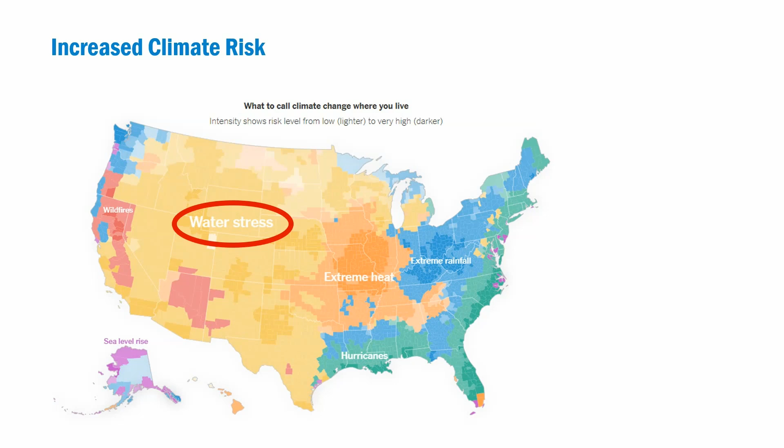Changes in our climate and trends in different precipitation patterns and changing hydrology have widespread impacts. Also issues like wildfires and the effects that it can have on our watersheds and water quality can really have large spread impacts and can have a lot of costs associated with solving these kinds of problems.

So changing precipitation patterns, drought, more intense heat at different parts of the year, it's kind of different themes that people have been talking about today. And then, of course, increased costs.

All right, so before we get into some of these adaptation plans and planning efforts, I wanted to define a few things. So when we're talking about vulnerability, you can think about it like a sensitivity analysis regarding certain populations in the community or a state or maybe even a county. So talking about your populations and how vulnerable they are to different hazards and how sensitive they are.

So a good metaphor for that might be if you're going into a blizzard wearing like a windbreaker versus if you go in wearing like a parka, like a winter parka. You're going to be more or less vulnerable to these kinds of hazards.

And then the hazards themselves, the main thing to mention is they're either human-induced or natural. And then another big part about that is the trend. So it might not just be a singular event like a blizzard or a tsunami or any of these other climate-induced effects. It could be a trend, like I mentioned earlier, with precipitation trends changing in the state of Utah and the Intermountain West.

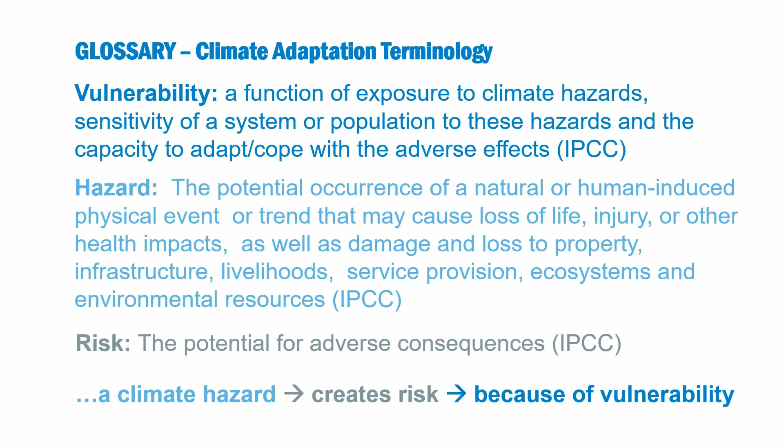So, of course, this is another busy graph. So if you want to take a picture of it, great. Otherwise, starting from the beginning, we need to identify those hazards. So I pointed some out earlier with the drought, different aspects of drought and changing precipitation, all these different risks and extreme events that are having different impacts on our communities and vulnerable populations.

And then we kind of want to move into the second phase. So we're identifying features at risk. So these are different assets in the community that might be more or less vulnerable to certain impacts. So these could be...

Infrastructure. So that could be your water supply infrastructure, your stormwater infrastructure. You could also be looking at your assets considering society and people, your communities, your different populations that enhance communities or strengthen different parts of that. And then obviously natural resources.

So locally, the Great Salt Lake, that's a very strong resource that we want to protect, and looking at ways—there's a lot of planning efforts going on right now to mitigate some of those risks associated with these assets. So moving along, we need to associate how these hazards affect these assets, and kind of link them together.

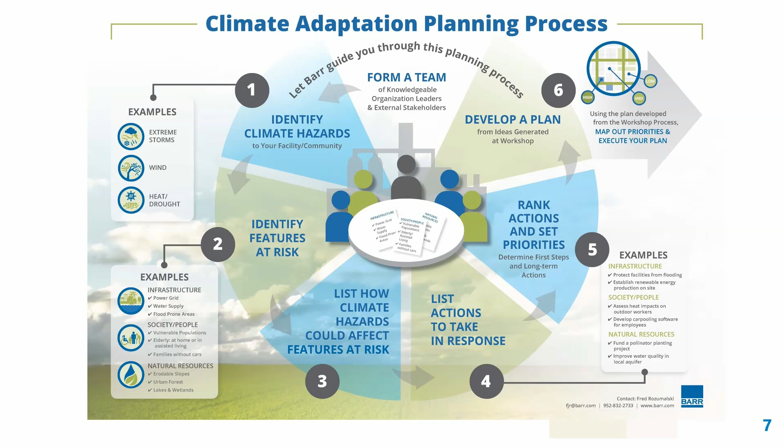And then you're setting your priorities as the next step. So even if we have a list of all these things, what are we going to start funding first? What if we have federal funding or state funding, what can we start to allocate funds for now, working towards creating or completing this plan that we've built. So that's moving on to the last phase, developing this plan and actually executing it. That's what we're going to get into next, talking about some real-life planning examples.

I'm not going to spend too much time here, but I wanted to make a point, going back to identifying your assets. A lot of assets in a community, or whatever domain you're setting for your study, can actually also be vulnerabilities too, so it's good to take that into account. A hospital can be a really powerful asset to a community where people can go if they have medical needs, but it can also be a vulnerability in case of a climate disaster. So looking at different ways that different assets can have vulnerabilities even though they have their strengths.

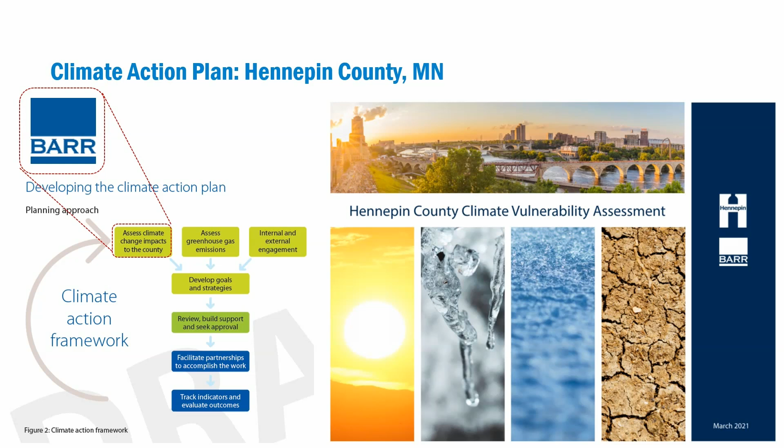This is one example of a climate change action plan that we developed for a county in Minnesota. They built out different areas to prioritize different funding mechanisms that they had. One place you start in the planning process is looking at your assets in the community, so community centers, community gathering places, infrastructure, and then associating that with vulnerable populations. These are different data sets that you can bring into these analyses to prioritize funding. The vulnerable populations are gathered from census data, age, education, housing, different mechanisms that you can use to set boundaries for determining your vulnerable populations. Then you get a composite out of that to prioritize your funding.

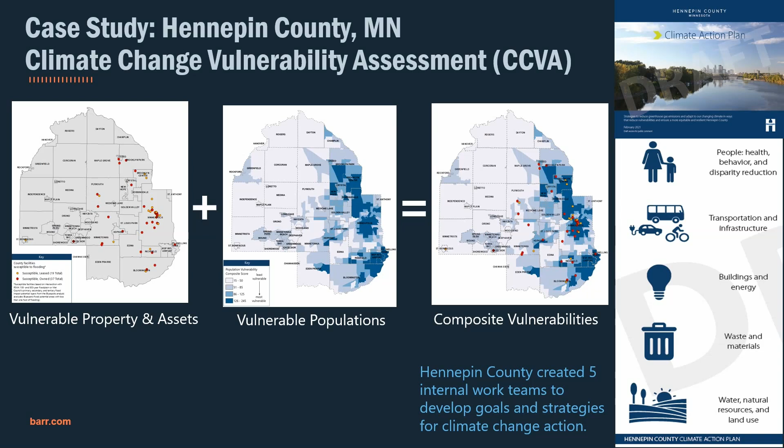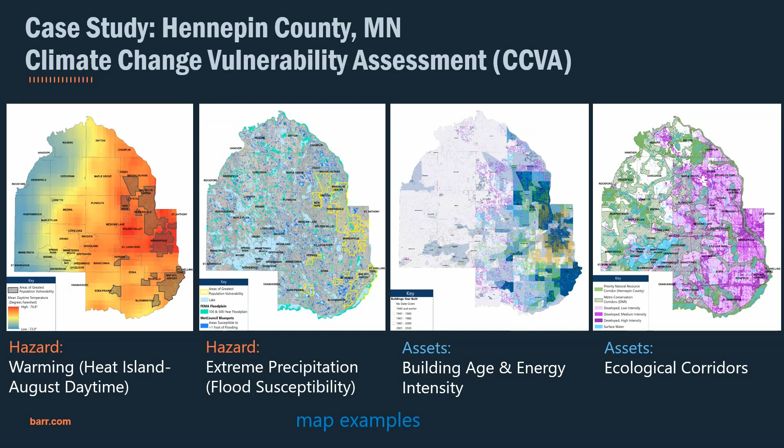Looking more on the hazard side, this is where you start to bring in your regional mapping of different risks or hazards. Here's an example of some warming effects from heat islands, and some precipitation and flooding risks that may be associated with higher rates of precipitation from climate change. And then different aspects of ecological corridors and maintaining natural spaces and conservation areas. So kind of bringing this all together, you can see those initial areas, the vulnerable population areas, kind of overlaying that together, and you can craft your own areas of prioritizing project funding or investing in these different project efforts.

Here's another brief example of a similar kind of project performed for the city of Cedar Falls, Iowa. This had a lot of similar data, all in GIS. GIS is a very powerful tool in this kind of planning process, leveraging different data sets to compile into one map that helps prioritize these different investments, which is a really big key. Also transferring that knowledge to any grants or different groups that could actually fund these things, these can create powerful tools to showcase what you're investigating or studying.

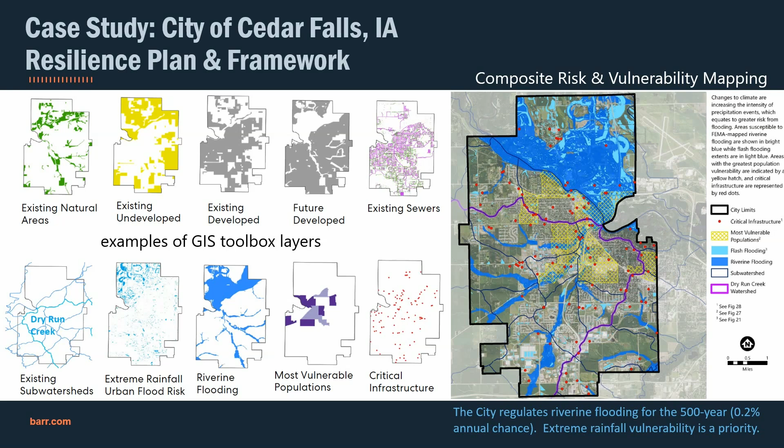Some little lessons learned, some big lessons learned. One big thing is determining the scale of your study and seeing what may be nested inside. Are you looking at a study from a county perspective? Or maybe a larger watershed, a river basin, a state, kind of determining the domain for whatever study you're looking at. That might expand into different opportunities for funding, so if you can bring in different project partners early on in the planning process, you may be eligible for different pools of funding.

So just some lessons learned there.

Back here, we've been in the planning process, looking at actions and setting priorities with these maps. Now we're going to move on toward actual project applications and how we've started taking action on the ground. One way we can do this is looking at adaptive reservoir operations, altering the typical operations of reservoirs from how we've done it in the past with manual controls, and actually bringing in technology and predictive machine learning.

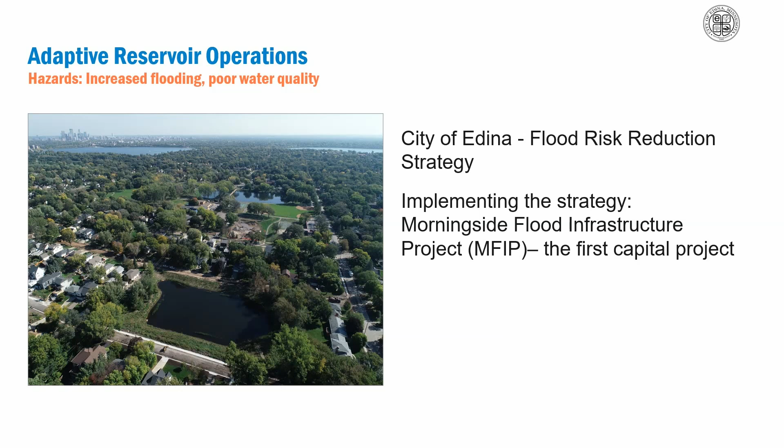This was a project for the city of Edina in Minnesota. From this graphic, you can see it was in a low area, so it already managed a lot of natural runoff that filtered into this low area. The site had a large forested area, and it had an existing stormwater detention feature, plus a small other detention feature.

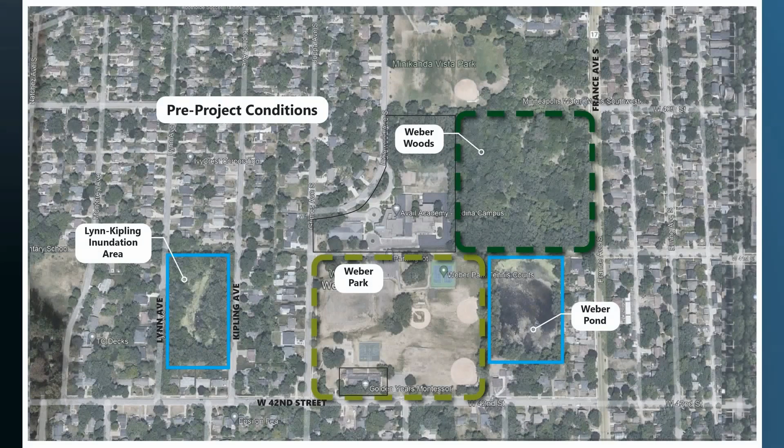The goal of the project was to use existing space in a highly urban corridor that had already been developed, and look for ways to expand stormwater storage in cases of increased precipitation from these changing storm events that are becoming more intense and more frequent, needing more adaptability in this limited space. That's the resulting project there.

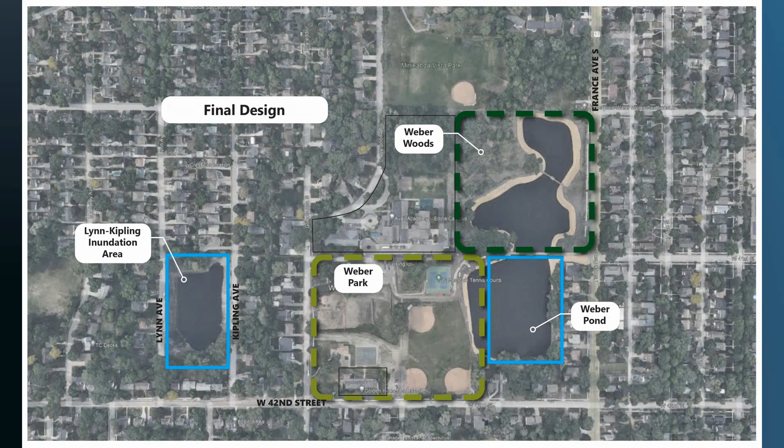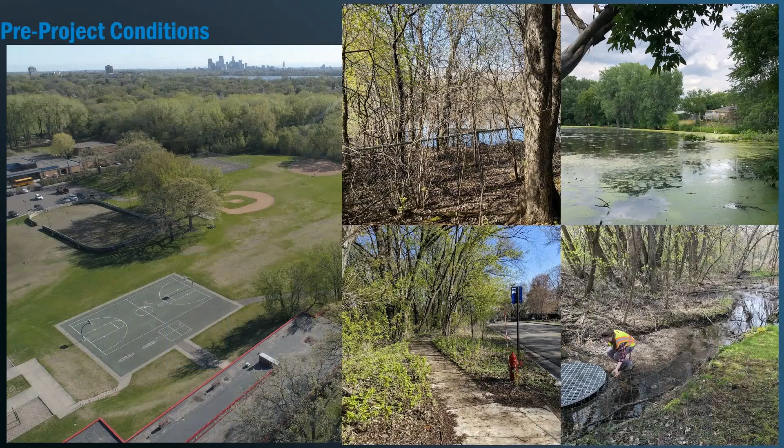You can see the pre-project, before things had been altered. You can tell the detention feature is a bit nutrient laden, maybe had some problems there, some maintenance concerns from the city who managed this property. So improvement could definitely be made from the original 1960 construction.

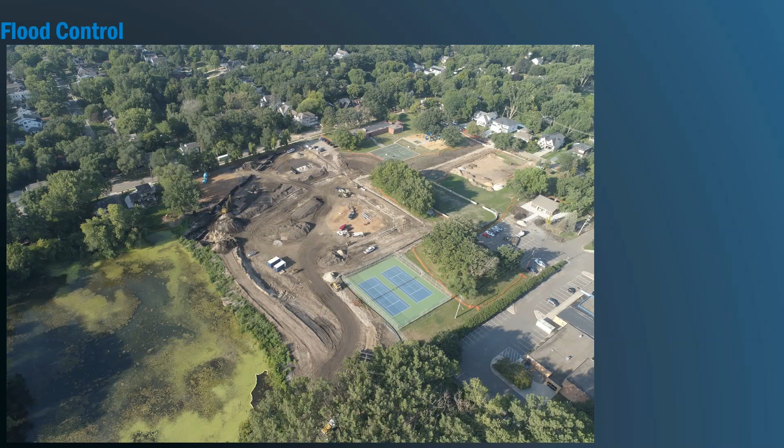Flood control was the main purpose of the project, as I mentioned, due to changing precipitation. Infrastructure needed to be added, some pipe, and also some grading to account for the additional storage available in the basin.

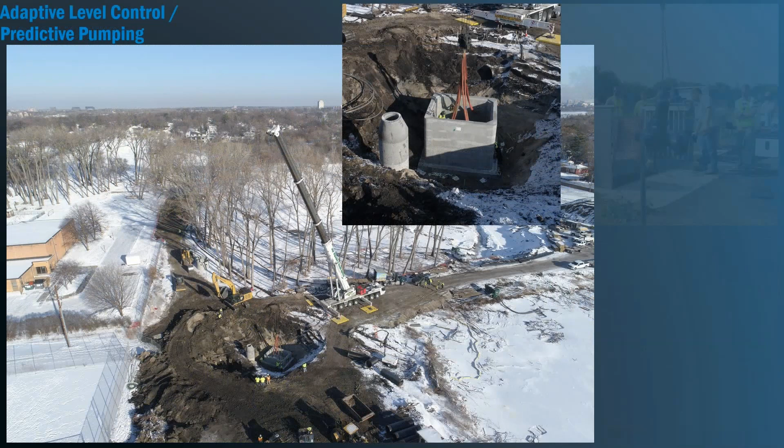My favorite part of the project, and a bit unique to this, is these adaptive level control pumps. There are two 4,500 GPM pumps installed at the outlet of this reservoir, and they allow for a drawdown of the lake for additional storage in case of storms. All of that is linked to a radar model, a NOAA radar that can predict these storms and start drawing down the reservoir in advance, so you have that additional storage ready.

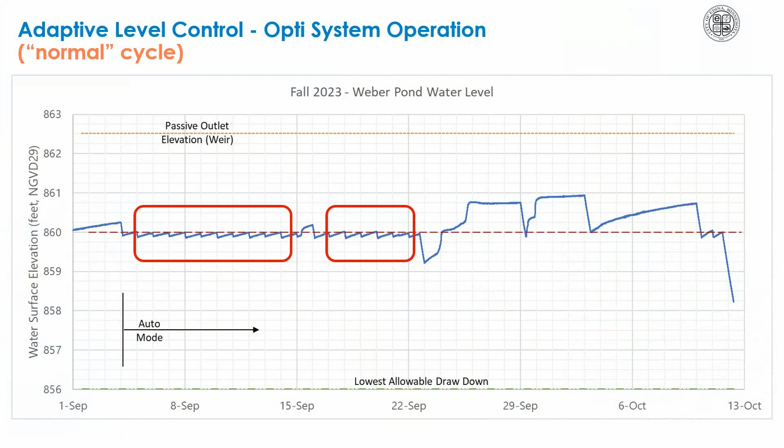Day to day, that's the operation of these pumps. It draws down the little bit that infiltrates into the reservoir, so you have slight fluctuation but an even water level in the lake. That's the normal cycle. Then in response to an upcoming storm that the system predicts by looking at forecasts and radar, they'll draw down the lake to a certain level accounted for in the forecast.

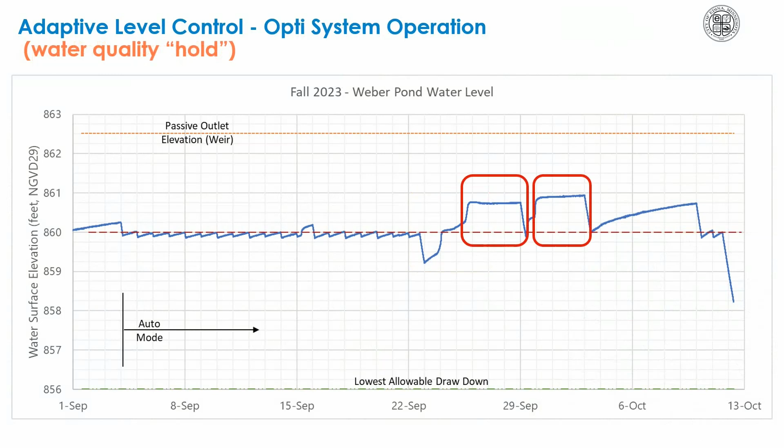When these precipitation events come in, you see a fill in on the lake. The program is set up so you can have a hold pattern, so you don't just automatically dump the water back into the system downstream. Instead you hold on to some of that water and settle out some of the nutrients or particulates instead of having those go downstream to natural systems that could be impacted. That holding pattern is pretty important.

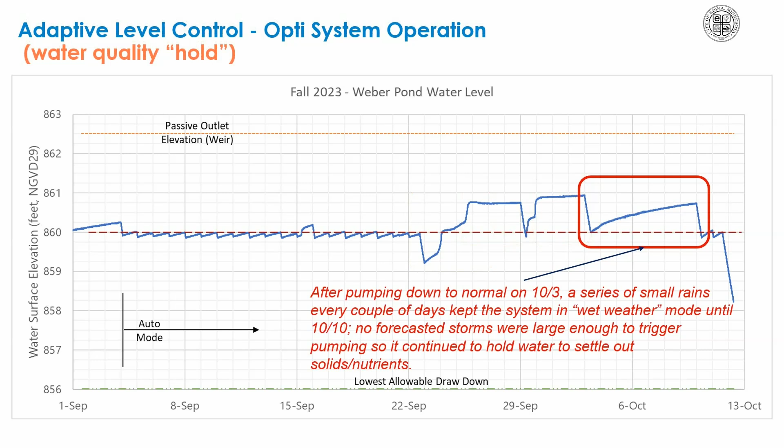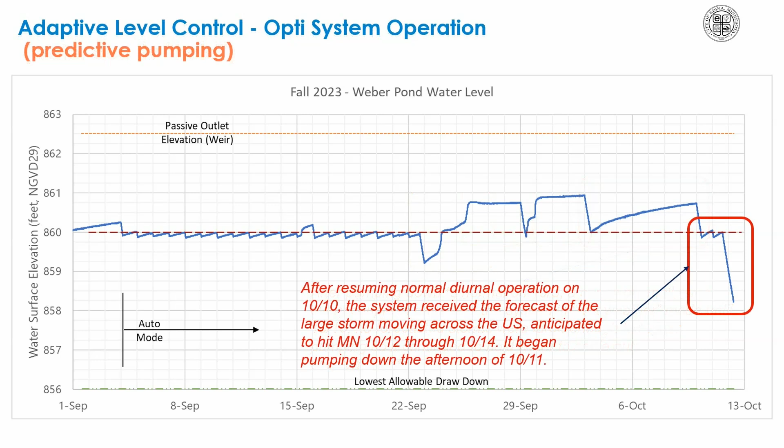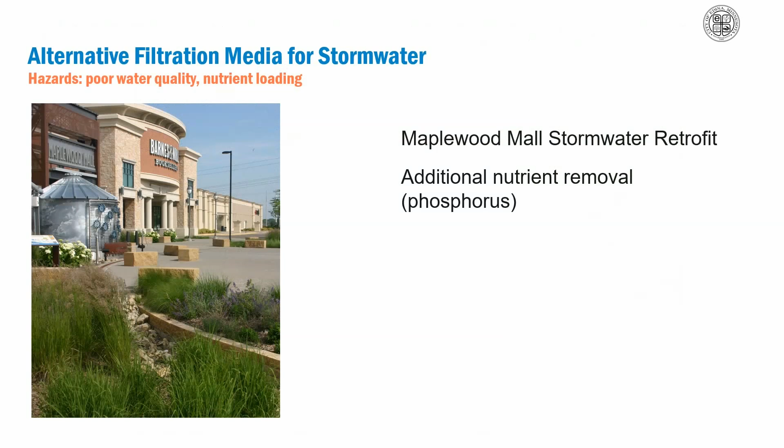Let's touch on two more things, one being alternative filtration media. I don't know if there's any chemistry nerds in here, I'm not going to go too deep. This was a project to look at different media in stormwater filtration, from an urban watershed where you have a lot of pollutants in the rainwater runoff. This was a larger project site in Maplewood, Minnesota, where there was a larger retrofit going on, and a number of rain gardens were established with that alternative media.

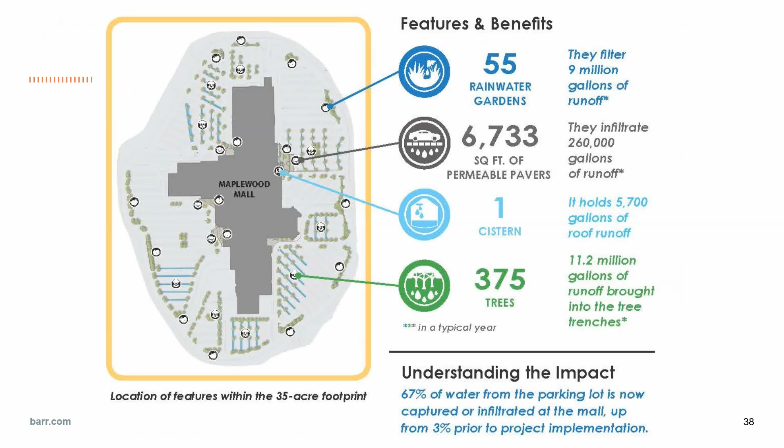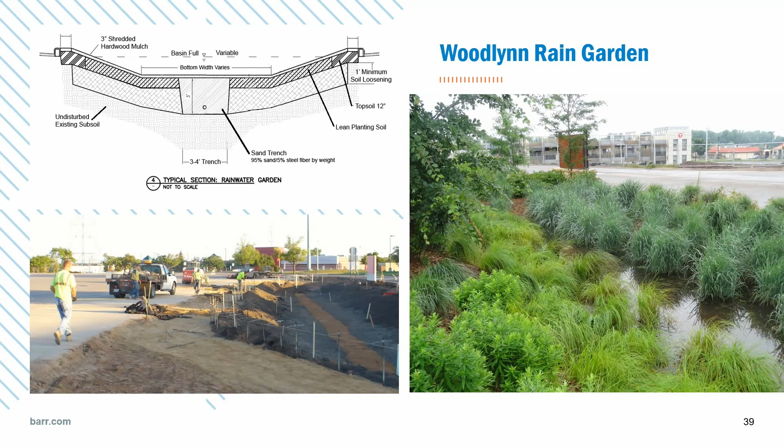In this case, it's iron filings. These iron-enhanced sand features can actually retain more of these nutrients and keep them from moving downstream to impaired water bodies. I think in this case it was Kohlman Lake, an impaired natural water body, so upstream they're trying to take in as much of these nutrients as possible. Here's some specs if you're interested in getting nerdy. That's the iron filings mixed in with the sand in the middle of the trench to enhance nutrient absorption.

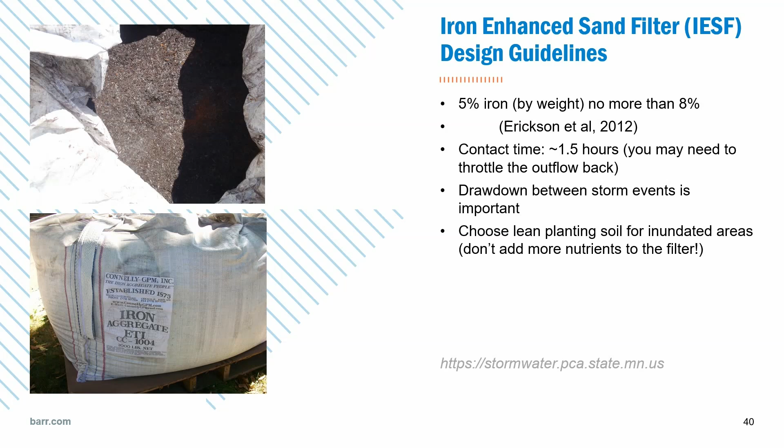Our last one is aquifer storage and recovery, or managed aquifer recharge — there's different names for it nowadays — this was a project for the city of Provo. They had issues with declining groundwater levels in some of their municipal wells, which was a growing concern. How are we going to fix this? If we keep pumping water out of our system, how will we sustain a growing population experiencing these changing precipitation trends?

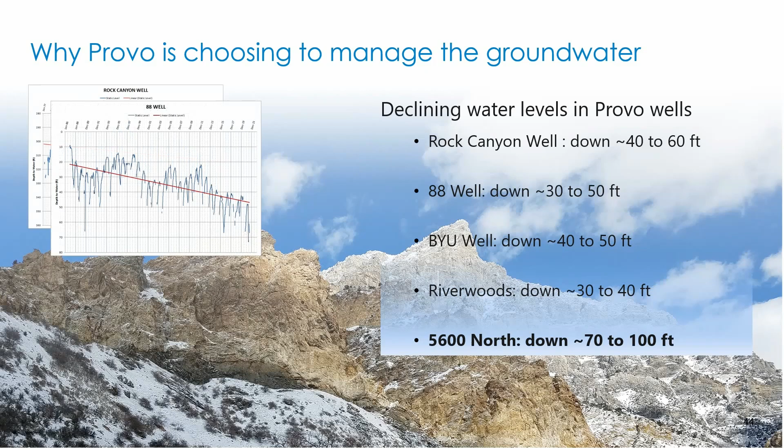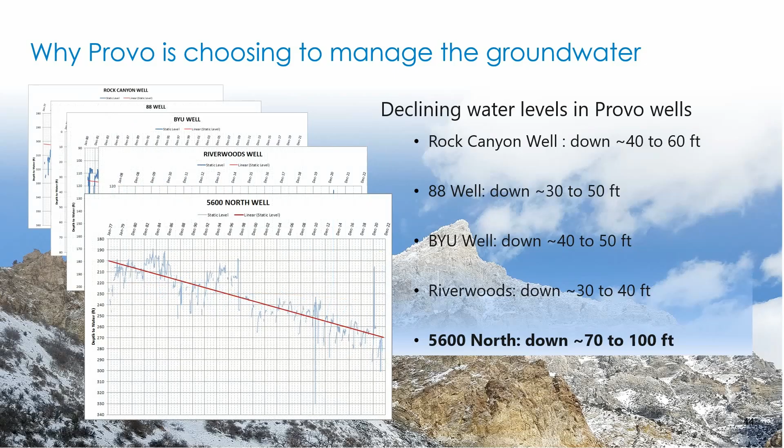So that's where we got to work, looking at sites that had already been investigated, areas of the aquifer previously mapped, and looking at areas where you could potentially infiltrate water back into the aquifer to recharge it. We looked at categories prioritizing sites based on what the city already owned, and what would be most susceptible to infiltration from the surface versus injecting into existing wells the city owns — you can put water back down pumped wells, or infiltrate on the surface. There were different ways we evaluated this, starting with a simple feasibility study.

It was the direct injection alternatives that were found to be most feasible, two to the north of the city — 5600 North and Riverwoods Well. These two existing groundwater wells would be retrofitted to allow infiltration back down the well at different times of the year when excess water is available to put back into the groundwater table.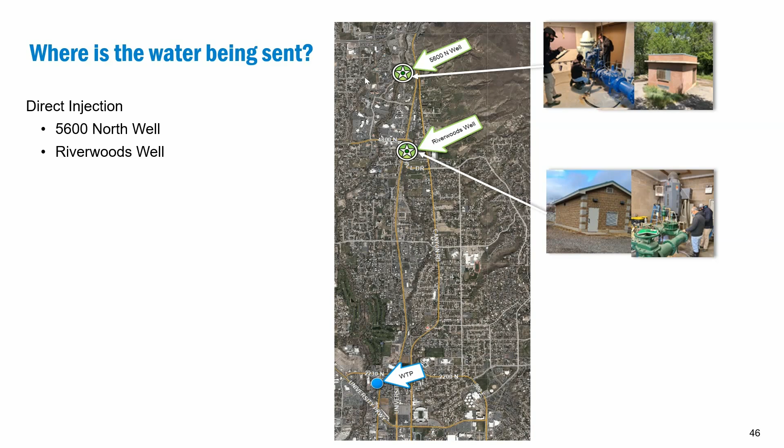Similarly, we have a surface infiltration feature — this one was at Riverview Park. Here are some photos from the piloting phase, where we take small portions of water and start testing and evaluating what the infiltration is like in this area, and what the rise in the groundwater table can actually be from these tests. That's the early stage, called piloting.

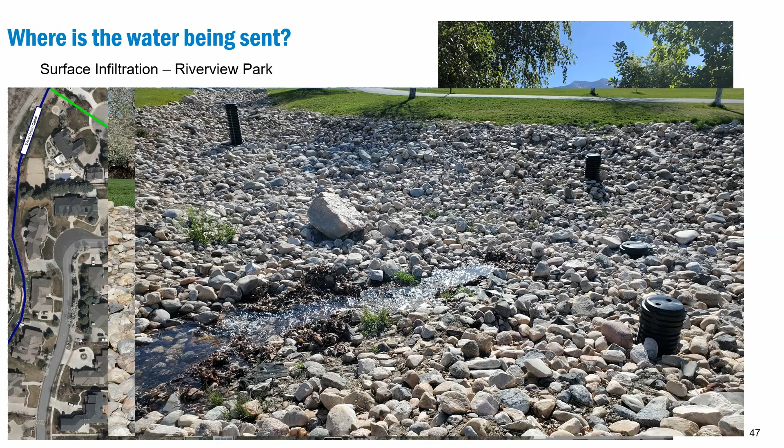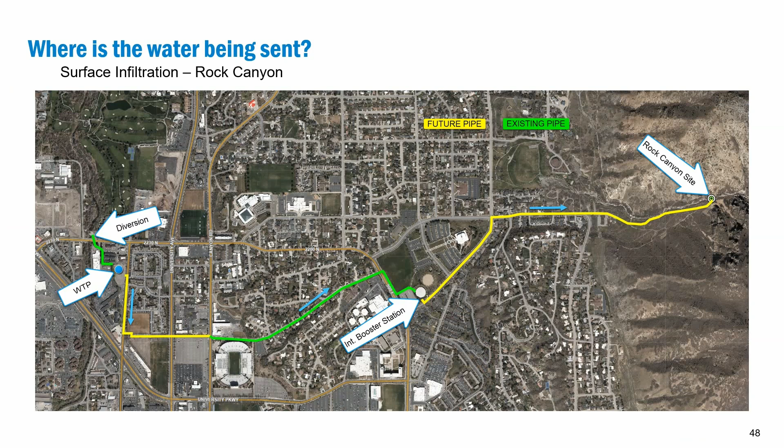So this is some photos from that. The second site was up Rock Canyon — I don't know if there's any rock climbers in the audience who've been out there, but it's gorgeous. However, existing infrastructure didn't exist at the scale needed to deliver water up the canyon to dump into these creek beds, which have a pretty direct connection to the aquifer.

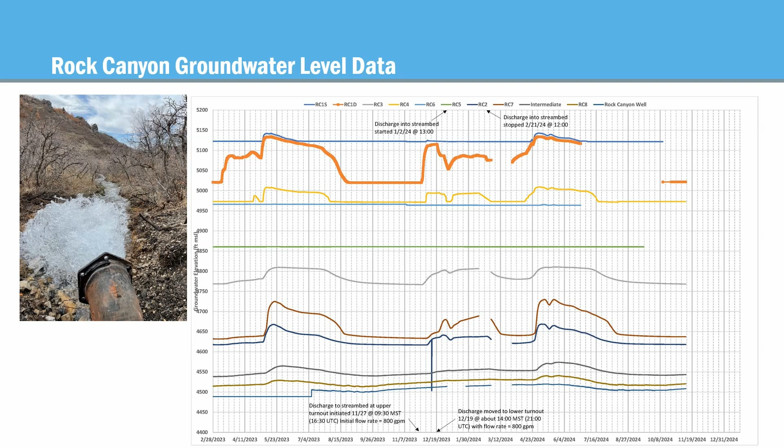So in summary, I know that was a lot of information. We looked at different ways we can prioritize funding opportunities and projects through these climate change vulnerability assessments, looking at vulnerable populations in these communities. And then actual project examples where we took what we learned from those vulnerability assessments and put that into action with projects that could mitigate some of those risks. So hopefully we can work it out. I'm hopeful that we can, so staying optimistic there. If there's any questions, yeah.

Couple of questions about the two cases you were talking about, one where the water was being released in advance of expected bigger storms. Is it just being released into the stream and downflow, but you're doing it in advance, or where's it going? Yeah, so there's a downstream system that does connect to a natural system, a river. So that is...

In advance of those storms, the system can predict the rough or approximate volume of that storm, looking at the density. I'm not a meteorologist, so I'm not going to pretend I know how that system fully works. But it associates that with a volume they can drain down from that reservoir, sending it downstream into the system after it's had a chance to settle out, and there's some other benefits passed along downstream from the reservoir.